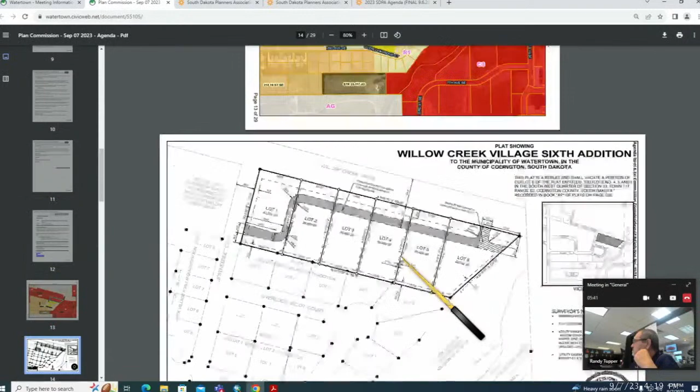We'll move on to item 6A on the regular agenda, which is Resolution 2023-33 for a plat in Willow Creek. I'll turn it over to you, Brandy. Thank you, Blake. So this is a plat submitted by Glacial Lakes Capital, LLC. This is a plat that will create 6 conforming lots in the C3 Highway Commercial District.

You'll see that they are creating a frontage road here which will be a private street, so that will provide the frontage, so there won't be individual access onto Willow Creek Drive.

The only modification that staff is asking for... sorry, there were some audio and muting issues among the participants while trying to sort out who was unmuted. Okay, all right, yep, Randy, go ahead. All right, sorry about that.

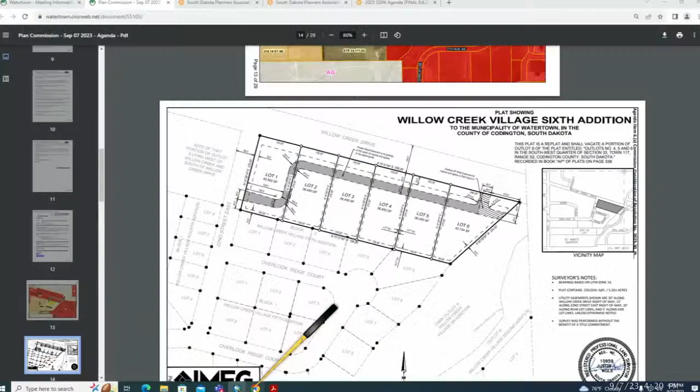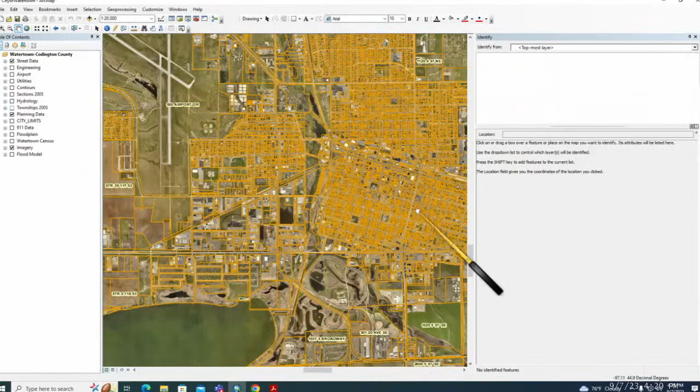So the only modification that staff will work with the applicant and engineer on is if we can modify where this access point is shown on the plat today, to where it's shown in red, just to give greater separation from 28th Street to the north there along Willow Creek Drive. That shouldn't cause any impact, but that would just be one modification that we would ask that Plan Commission consider in their approval.

And that's because those two intersections are going to come to a T there. They won't be aligned with 28th. So if they are not able to be a through intersection, then they should be offset at least 140 feet. So this offset, instead of it being 103 feet, will make it 230 feet.

Looks good. So, can I ask a question or not yet? Here, may I ask a question?

So, okay, on the north side of those, where the service road is, is that commercial up to First? Or what is that? I'm confused by that.

So that will be parking, actually. Is this what you're talking about, Rhonda, this area? Yeah, so they will have parking. This is, in theory, a private drive, but it has the width to be the private street, so it will provide the through street for these lots.

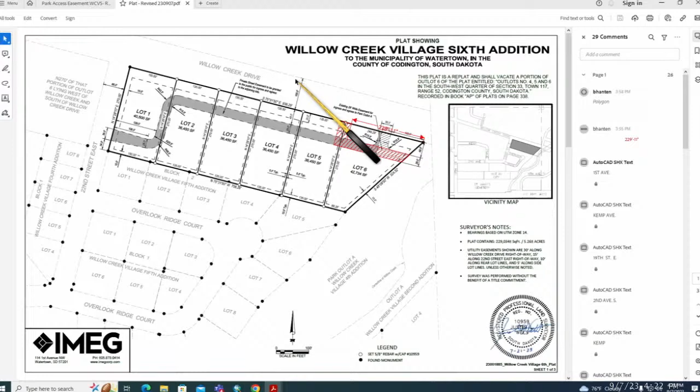The land north of this, of the platted area, what is that? Oh, this is Willow Creek Drive. Oh, that's the road. Yep, I'm with you now. So it's this property here on the map, this one right there.

So they will come in off of 22nd, and then they'll come up and exit here. So it's really the benefit of having controlled access onto Willow Creek Drive, and then it'll just be an interior parking lot.

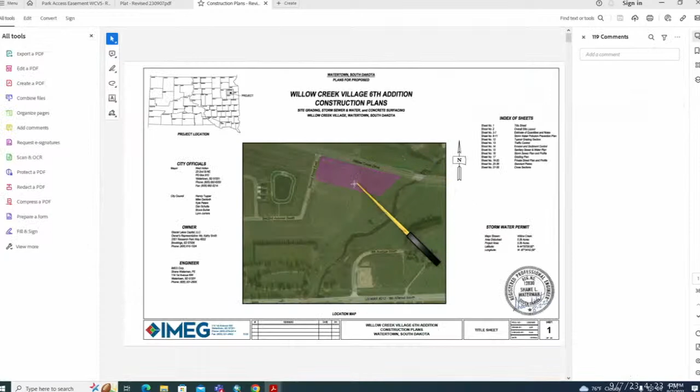So I can show you guys just to get a better idea. So they're going to be individual lots, though. I'm a little confused on the note that doesn't require a development lot agreement.

So they are individual lots, so we have a private street maintenance agreement, which is attached in your packet too. That will spell out the maintenance responsibilities of each lot owner.

So you can see here how the parking will be configured within that street. It's going to really look like front parking lots. Is there an access easement that goes with those lots that lays over that private street? Yes, they're going to have parking on both sides of the road, so people will walk across the private road to get to wherever they want to go. It will function like a parking lot.

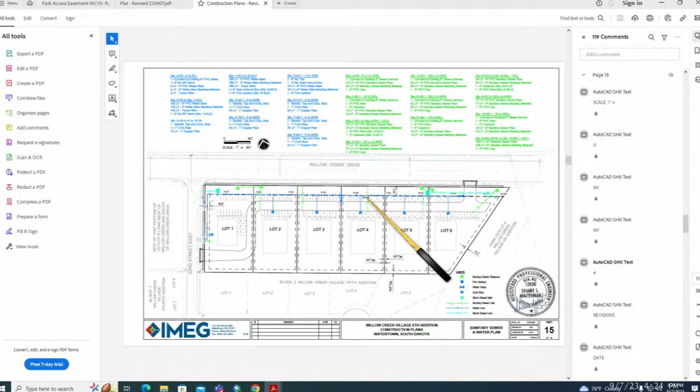But these are R2 lots, right? C3. C3, boy, I am out to lunch today. I think the view that has the color zone on there is the best one to look at, because that shows it, right there. So you can see the C3 zoning. The shape looks just like the R2 lots though, that's why I was looking at the yellow, funny, what are we doing here.

Okay, yeah, I think that looks good, and the road moves is reasonable, and that follows then the design standards in terms of the requirements.

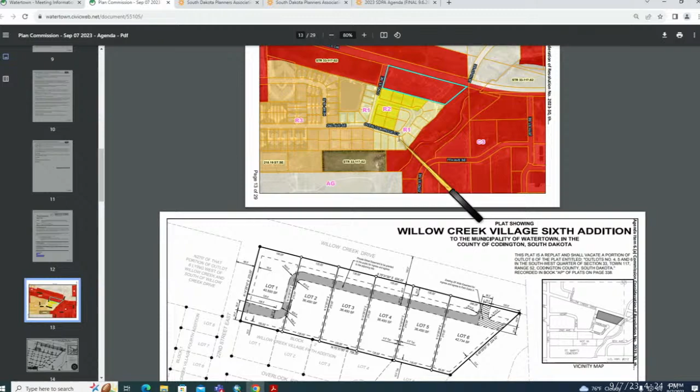Yes it does. Mr. Chair, I have a question. So we run into private roads a lot. I know like in front of the mall, for instance, that one doesn't have a road agreement that I'm aware of. But normally the city doesn't take over private roads. In order for the city to take it over, we would require curb and gutter, inlets, drainage, those type of facilities.

And not necessarily a question for today's meeting, but I almost wonder if the city shouldn't consider what it would take for the city to take ownership so we don't end up with potholes like happened in front of the mall. I know they fixed it up in the last year, but there was a while where it was really, really potholed, and it wasn't a city street, although everyone drove on it like a city street. This will be a similar situation, this is for 6 businesses, hopefully very successful businesses, getting a lot of traffic. Just food for thought for future reference.

So it'll be really hard for the city to take it over because it won't be up to city standards. Well, and I think that's a good point, but this is much smaller scale. You could see like a condo plat where you have that shared parking lot anyway. But the mall was a whole other scenario because there was a right of way that dead ended into that parking lot at Jensen Avenue, so that really should have been caught and connected through. So that's the difference here, this is 6 lots that will be utilizing 2 access points.

The scale and scope of this is similar to the strips across the street there on the corner by the car wash. It's a similar layout, a little bit longer I think in terms of total land mass there.

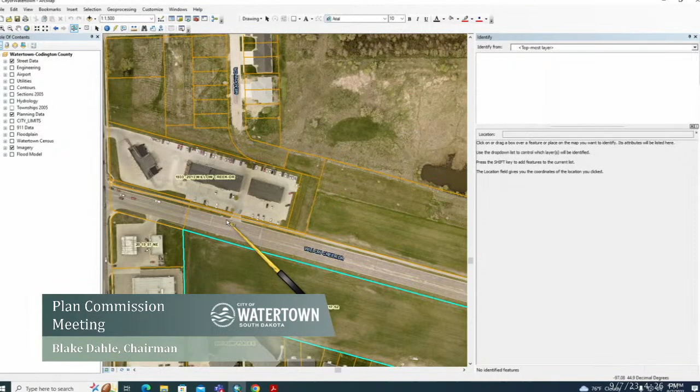And the only thing I bring up is we just have a handful of these. The mall is probably the one that got the worst before it got fixed, but even in front of Walmart, that's not a street, that's Walmart property that gets accessed like a street. My thoughts are if it functions like a street, there should be an avenue in which the city can consider it a street. This is labeled as a private drive and has a maintenance agreement, which is great, and hopefully it always stays well maintained, but just food for thought for a future development.

And we do have that specified here, as far as the developer agrees to maintain the access easement area including the paved roadway in a state comparable to that of a dedicated city street, and to keep the roadway free of snow. In the event the developer, its successors in title or interest, fails to perform said maintenance activities in a reasonable manner, the city may, but is not required to, perform the maintenance.

And then the developer will reimburse, or the successors will reimburse the city. So that's something different too that we did not have in place with those.

Yeah, exactly, and I appreciate you reading that. It just feels like if the city is going to do the maintenance on it, potentially if the landowners don't do it themselves, and we're doing the maintenance on it, it feels like a city street. It should have an avenue to become a city street, other than our current avenue, which is bringing it up to city standards - if this is built as a private drive, it'll be far from city standards. And it's very difficult to get them to city standards after the fact.

Well, in a scenario like this, we would not want that to be a public street because we have a public street. So it's actually a benefit that they are not having separate access points onto Willow Creek Drive.

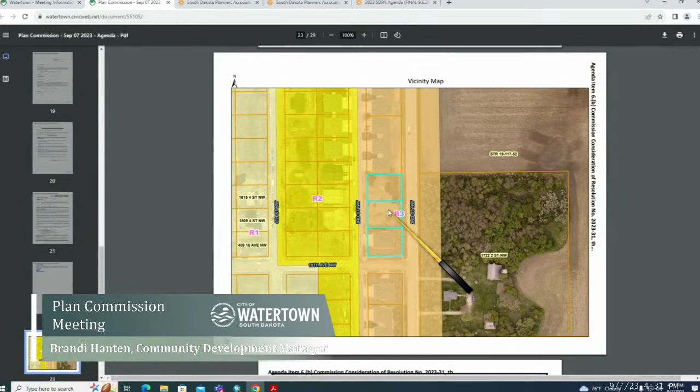Okay, thank you, Blake. So this property is owned by Les McElhaney, and he is really doing a lot boundary adjustment that is typically a minor plat, but because we've had a replat within Valley View within the last 3 years, it has to come forward to the Plan Commission. So really, he's turning the 3 lots into 2, and this is zoned R3.

And there's not a building permit issued because he's adjusting the lot line, which is ideal - we would rather see it done this way than a development lot agreement. He is going to add 4 feet from this southern lot into this one lot. So you can see here, the lot line was this dashed line, and then it's being moved down 4 feet just to work with his building plan.

This lot 1A still has sufficient frontage, and it meets its setbacks, being that the building is already constructed. It actually had 18-foot side yard setbacks, so there's plenty of space - they only need 10, so he still has 14 feet of setbacks.

Stand by for any questions. Is he the owner on both lots? Yes. Okay.

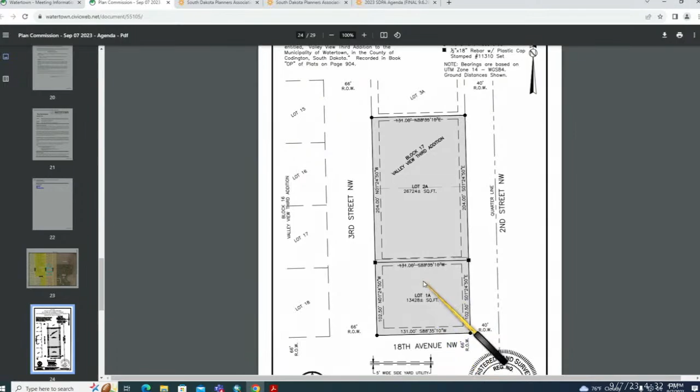He's been doing a lot of work up there. Looks nice.

Any questions, comments? Do we have a motion? I make a motion to approve. Do we have a second? We'll go ahead and take a roll call. Brink, yes. Dahle, yes. Dargis Johnson, yes. Spire, yes. Oletzky, yes. That motion carries.

Move on to item 7, open public comment. I don't think we have anybody here to speak on an item that's not on the agenda. Anybody online on Teams?

Did Randy want to tell us about that vehicle? We caught you off of mute.

Sounds good. So we'll move on to new business. And I do have a discussion point on there for the R2 and R3 density discussion.

I think I'll take this over at the podium here so I can pull it up on the computer. Yes, we'll turn it over to Blake, and then I have it pulled up here. All right.

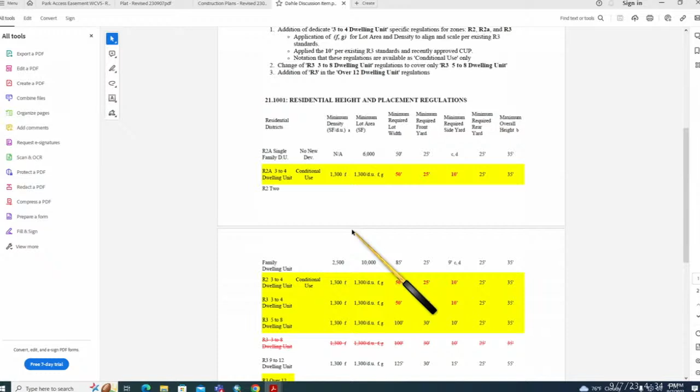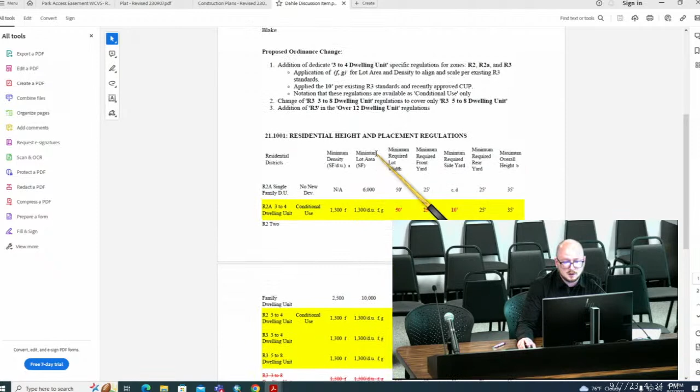So the precipice, I guess, on the discussion here was a month ago at the Board of Adjustment, we had a conditional use request for a 3 or 4 dwelling unit. Went in west of the old middle school. So that's an R2A lot. 3 and 4 dwelling units are allowable in the zoning districts R2 and R2A as conditional use. They're permitted use in the R3 district.

With the R2A lots being older lots in town, the preponderance of those lots are typically at that 50-foot lot width, which is the standard minimum lot width requirement for R2A. That lot, I think, was subdivided just over 50 feet, so it met the requirements, slightly above it. As we debated on that, we did set the side yard setback at 10 feet, which was in line with the R3 setbacks that govern 3 and 4 dwelling units as well.

The issue that I had, and that did carry with all support except for myself, and it was strictly on a principled issue, is that I do think we need to adjust the ordinance if we're in support of that type of development at that lot width density.

Because as it stands today, if a developer wanted to come with that exact same 3 or 4 unit dwelling in the R3 district, which is supposed to be our higher density district, they would have to have twice the lot width requirement, 100 feet versus 50.

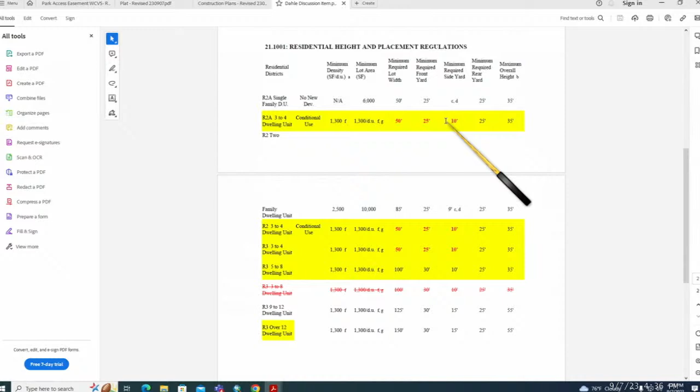I do think that the scaling factor we've got in terms of lot area coverage for density, based on dwelling units and bedrooms per dwelling unit, that we've got in place in the R3 makes sense to also apply here. Today, it does not apply to R2 or R2A for 3 and 4 as conditional use, but my proposal would be to align it, so it doesn't matter whether it's in R2 or R3 - you're basing the density and minimum lot size requirements consistently across the board.

Any thoughts from the rest of the board?

I think that's a good idea. I think the one issue we always run into with the R2A is they're small. We have it in our ordinance that we don't create that zone anymore. Right, that was a zone that was created in 2006.

as an attempt to capture a bunch of old Watertown that had those existing smaller lots, so that every time someone came with a building permit, they weren't looking at a variance. So when that CUP came to us, they weren't looking for a variance, they were looking for a conditional use. And, you know, it was a small lot. I was the one that made the motion to approve it with those conditions.

I added that condition of 10 feet to make it, you know, feel comparable to the R3 in that case.

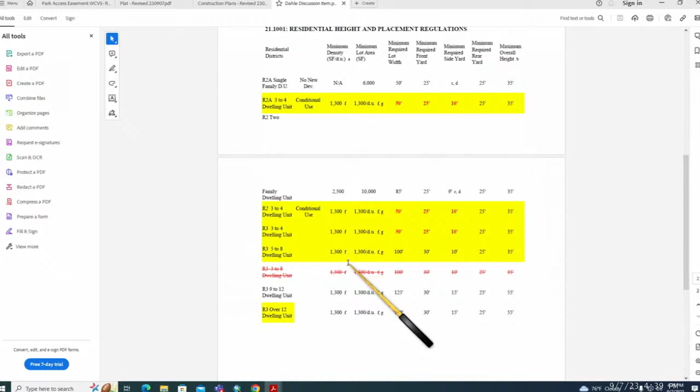So if anything, it provides us an easier course for doing a conditional use in the future, because these are the requirements we're okay with in terms of minimum lot size, density, setbacks, which did align with the conditional use we approved. I'd be okay if something like this came forward for discussion with possible action. What I really didn't like, and why I said no that night, was that you couldn't take that same structure and put it on an R3 lot. The only difference is an R3 lot, in theory, would have been platted at the correct size. Our minimum R3 in general is 100 foot, so we shouldn't run into as many R3s that are only 67 feet wide like that property was. It's just the R2A, an old piece of property we deal with.

But I know what you're saying. I'll just say that I like this proposal a lot, and I also like breaking it out, because we have the conditional use of 3 or 4 dwelling units in the R2 and R2A district, and you're still being zoned R2, which is two-family attached, but getting up into multifamily with 4 dwellings. So I think this adds consistency to those types of proposals - keeping it more in line with the R2 district, and not getting this high density where, as Blake said, you couldn't do that in the R3 district. So I like it, and I also like that Blake put the thought into it.